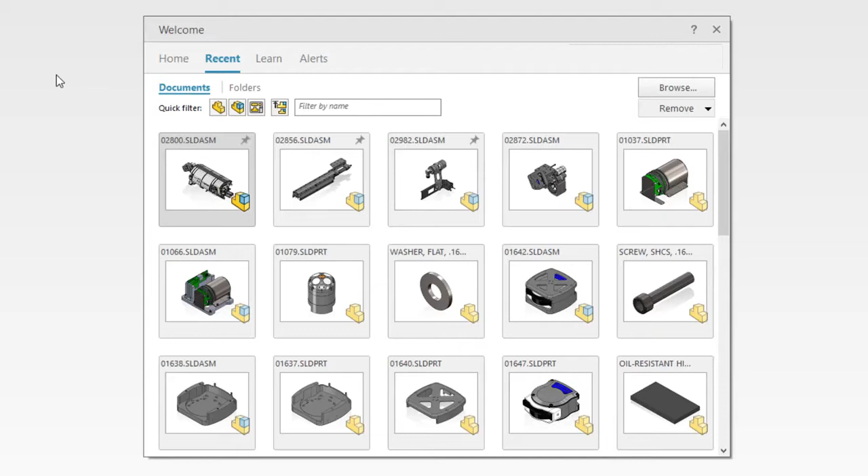You demand the best performing tools so you can work as efficiently as possible. SOLIDWORKS 2021 delivers multiple new enhancements to access your data faster and work more efficiently. Open times for both resolved and lightweight assemblies have been improved in SOLIDWORKS 2021.

This 2259 component assembly opens in only 21 seconds, making getting into your designs faster than ever. The larger the assembly, the greater the gains you will see while opening them in lightweight mode.

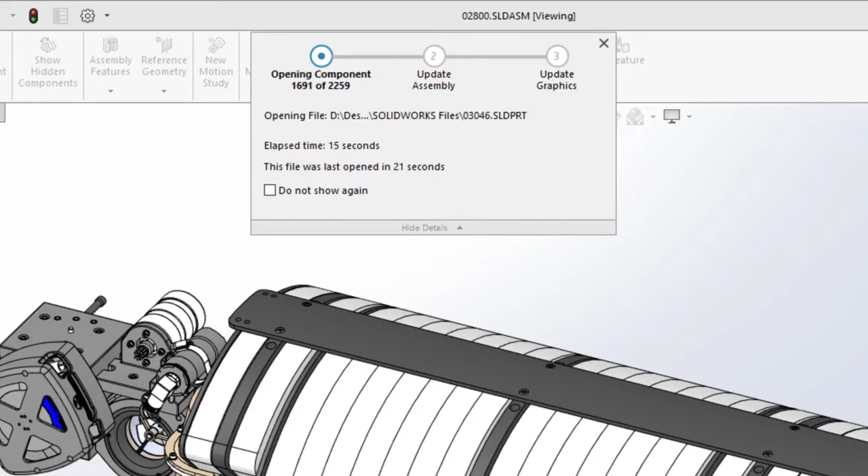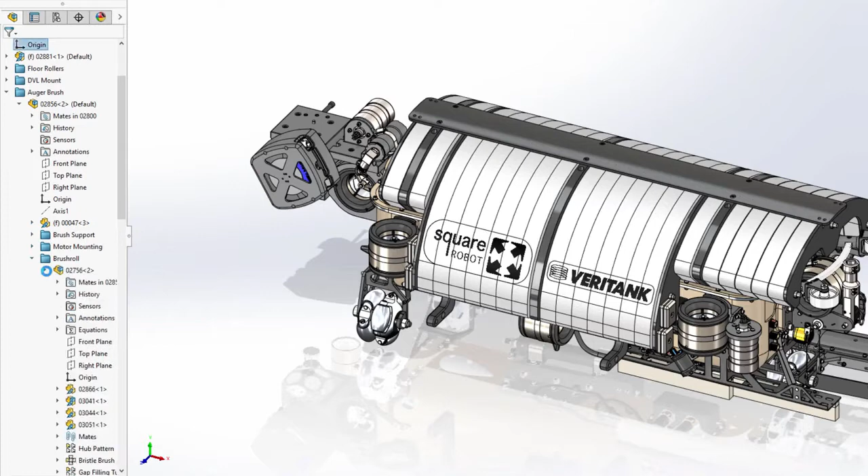To improve working with lightweight components, there is now also a more streamlined approach to accessing their assembly and feature information. Simply expanding a component from the FeatureManager tree will now dynamically load those components on demand, giving you access to the fully resolved subassembly or part.

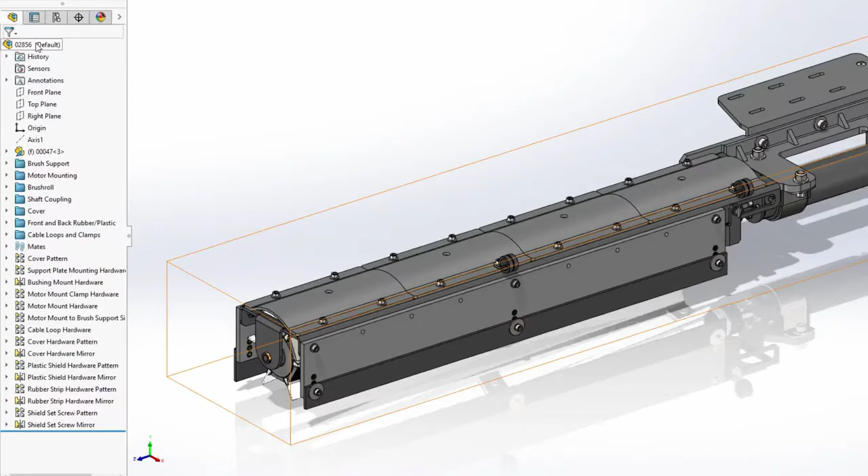This prevents unnecessary loading of large assemblies, but also allows you to quickly access and resolve the components you're working on as needed. Working with configurations in SOLIDWORKS 2021 is now also faster. Both switching between and creating new configurations are now significantly faster for assemblies.

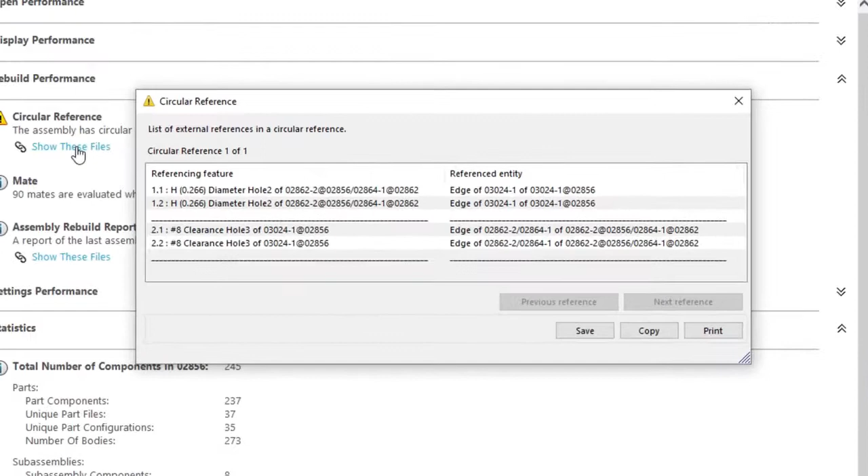The Performance Evaluation tool within SOLIDWORKS has always been an invaluable resource to give insight into areas of a design that may cause performance degradation. New for SOLIDWORKS 2021 is the analysis and reporting of circular references within an assembly. In this case, two holes on two separate parts have been found to reference one another.

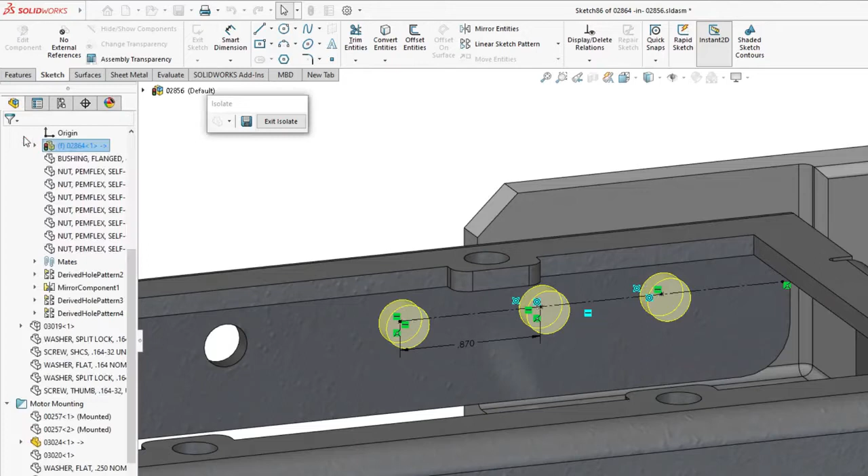You can use this information to further investigate the design and determine how they're referencing one another to fix these issues. In this scenario, one of the components listed in the report contains a hole wizard feature, where its location sketch has center points that are referencing the edges of a hole in the adjacent part to locate them concentrically. This is a common top-down design practice to ensure that holes always remain aligned to one another.

However, investigating the second component's feature, also a hole wizard, it appears that the center points within this sketch are likewise referencing the edges of the previously interrogated holes. This creates a circumstance where both features are trying to define the location of each other, or a circular reference.

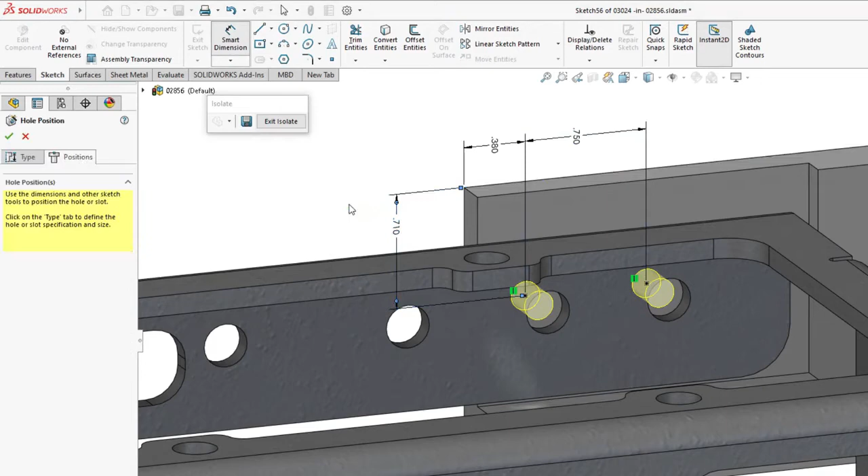To fix this scenario, the best course of action would be to remove the external references and redefine the location of the hole centers in one of the sketches, in this case dimensionally to the part they reside within. Once the changes have been made, a quick rebuild removes any warnings from the assembly.

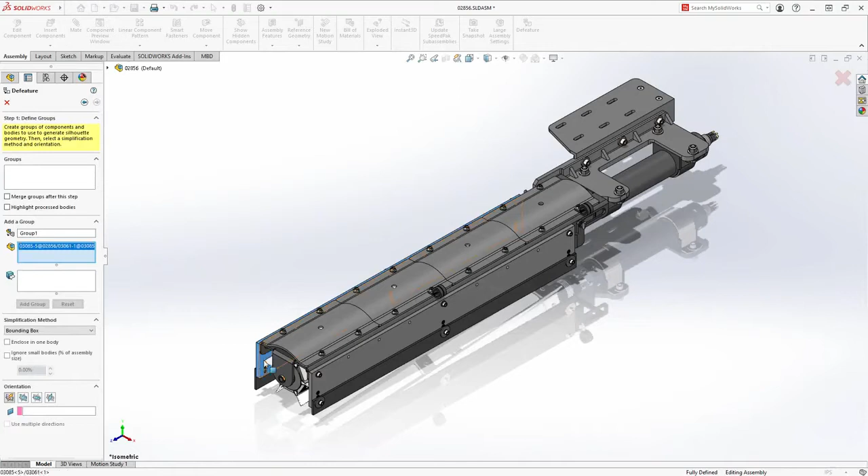Finally, you can use the Defeature feature, introduced in SOLIDWORKS 2019, on an assembly to create a simplified representation of it, or to protect proprietary information. Defeature provides an intuitive step-by-step workflow to define this simplified version using a variety of geometry simplification tools.

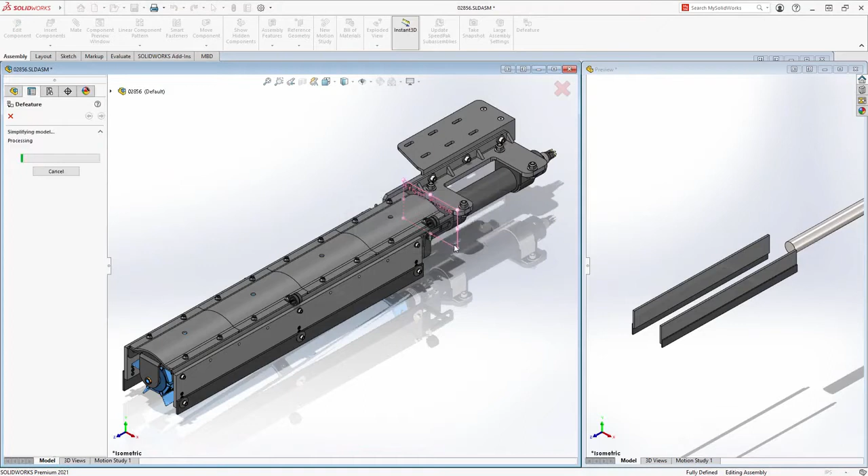While you are selecting the components, bodies, or subassemblies you want to simplify, you will always have a side-by-side view to show what your finished representation will look like. This ensures that you can capture the correct amount of detail. The methods you can use to simplify your geometry range from something as simple as a bounding box or cylindrical representation of the components, or something a little more complex, like the polygon or tight fit methods, which add a little bit more detail to the final results.

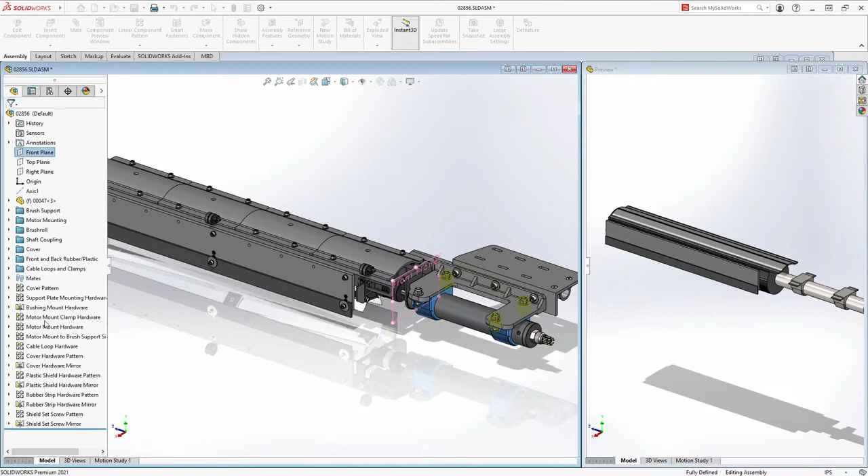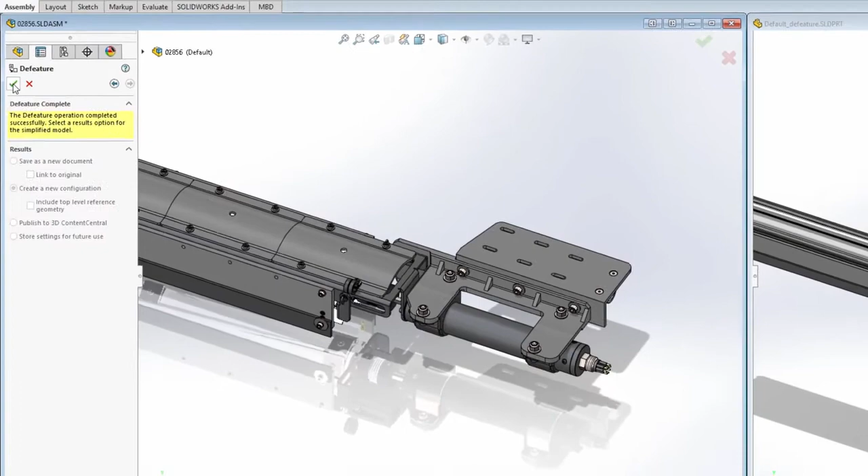Perhaps some of the components in your subassembly are critical to show in a top-level design, even within a simplified representation. For those instances, you can choose the copy geometry method to capture all of the detail of those components, bodies, or subassemblies. What's new for Defeature in SOLIDWORKS 2021 is the ability to save this simplified representation as a configuration within the same assembly from which it was created. This eliminates the need to manage a separate file that contains the simplified model.

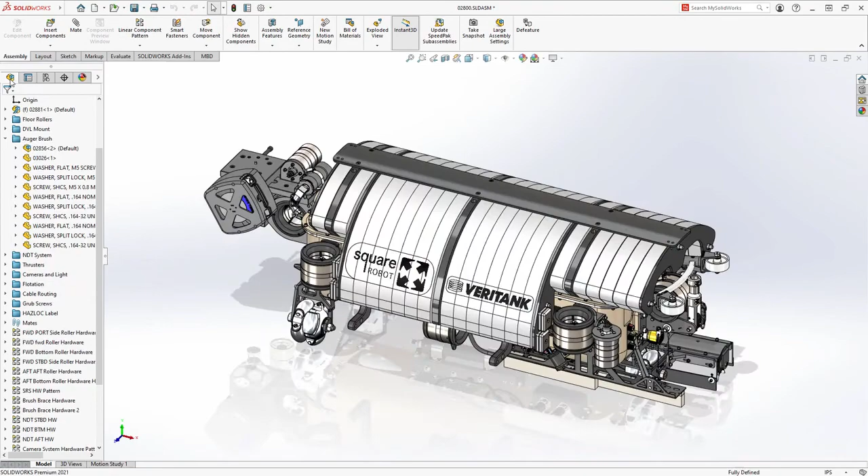You may still want to use those other methods when using Defeature to remove proprietary information from a design to share outside of your organization as a separate disconnected file. However, when using defeatured models within higher level assemblies, it is now as simple as right-clicking on the component and choosing to use the defeatured version.

Defeatured assemblies as configurations provide a way to both simplify complex assemblies visually and also add a performance boost in cases where the detail of the individual components isn't necessary. With these new performance-oriented features in SOLIDWORKS 2021, you will be able to work faster and more efficiently with larger and more complex designs.